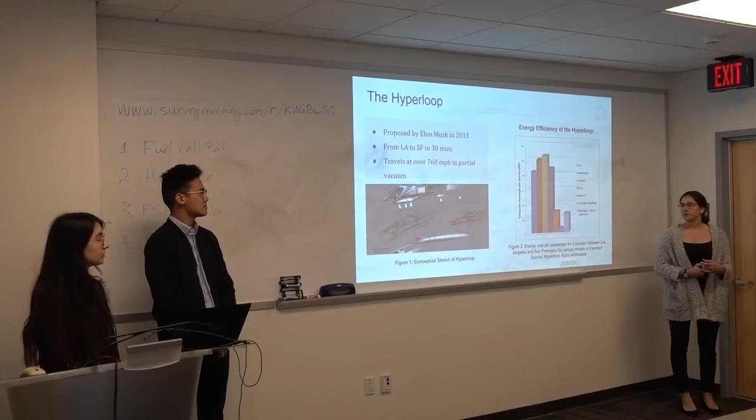So a bit about the Hyperloop concept in general. It was first proposed in 2013 by Elon Musk in the Hyperloop Alpha white paper. It has the potential to take you from LA to San Francisco in under 30 minutes, which means that you could live in LA and work in San Francisco, which is pretty amazing. It would be a lot more efficient and sustainable than our current modes of transportation. And it has the potential to be the fifth mode of transportation that we have.

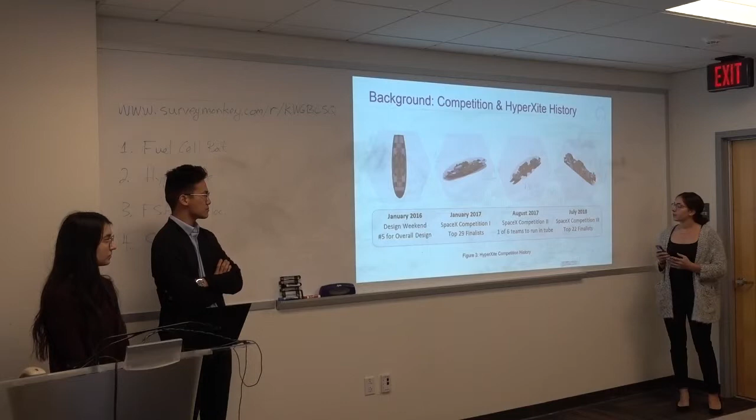A bit about HyperXite as a team. We were first formed in 2015 and attended design weekend in 2016, and we placed fifth for our overall pod design worldwide. The following year we attended the first SpaceX competition where we were one of the top 29 finalists, and later that year we were one of 6 to run in the open air Hyperloop vacuum tube. And this past July we were one of the top 22 finalists to attend the third SpaceX competition.

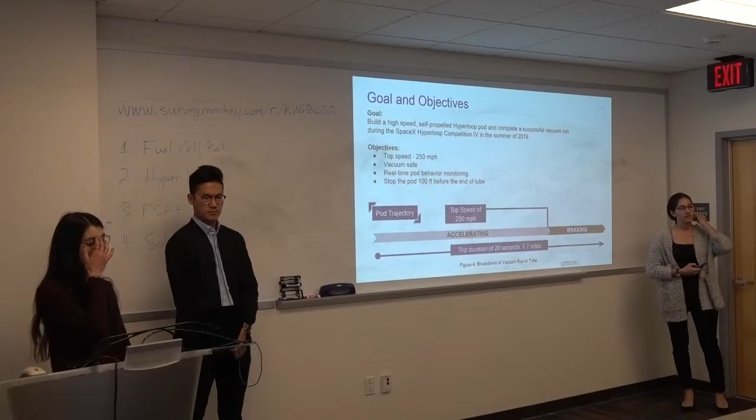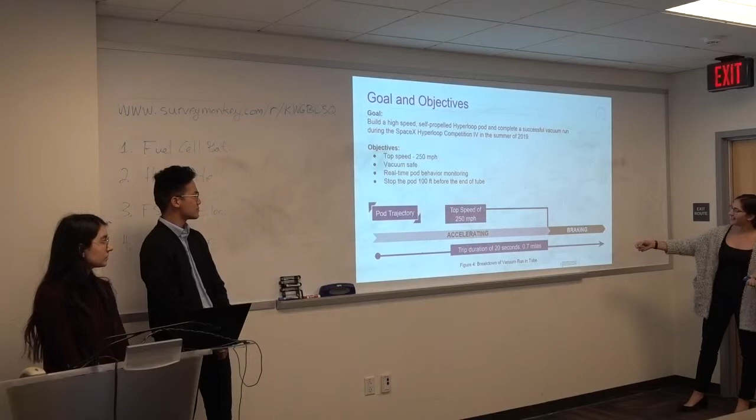So about our goals and objectives for this year, our goal is to build a high-speed self-propelled pod and complete a safe, successful vacuum run at the fourth SpaceX competition, which is going to take place next summer. And our objectives are to reach a top speed of 250 miles per hour, be vacuum safe, have real-time pod monitoring behavior, and stop safely 100 feet before the end of the tube. And here's a schematic of our pod trajectory. As you can see, we spend most of the time accelerating and then a bit of the time braking.

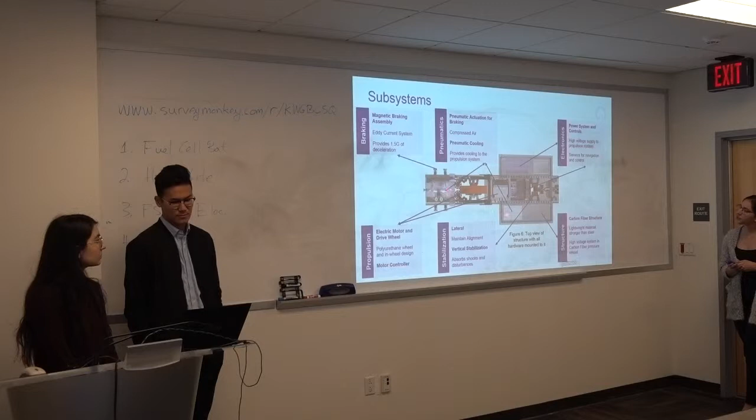We're going to go into more details about each of the different subsystems, but just to give you an idea of how everything fits together, that's the front of our pod, and our braking system is attached to the front. Our propulsion system is right here. We'll go more into detail about that too. Our pneumatics, they actuate our brakes, and here's our coolant. Electronics are placed, batteries are placed in a pressure vessel over here, and then we have our control system. And then our structure is the whole thing, and our stabilization, we have both lateral and vertical stabilization to stabilize our pod.

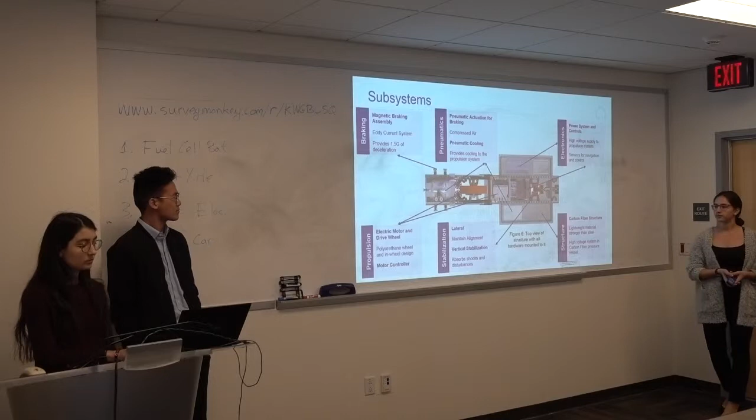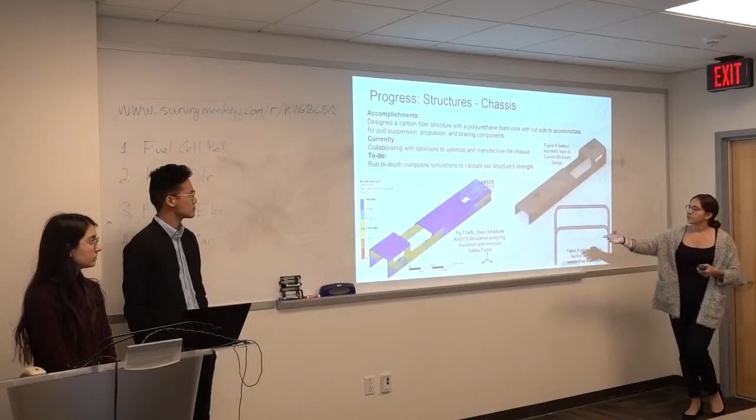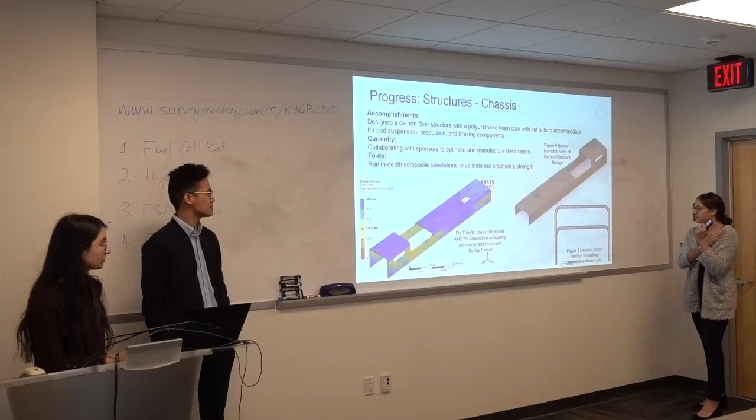So the progress of our structure, where we're at right now is we have designed a carbon fiber structure with a polyurethane foam core with cutouts to accommodate for mounting different components onto the pod. Right now we're optimizing our design and contacting companies to see if they have any feedback for us and how they can help. And the next step would be to run in-depth simulations to make sure that our design will work. This is a static structural simulation of our design, and this is a render. So as you can see, it looks like we're on the right track. And here's a cross-section of how the carbon fiber would have a foam core.

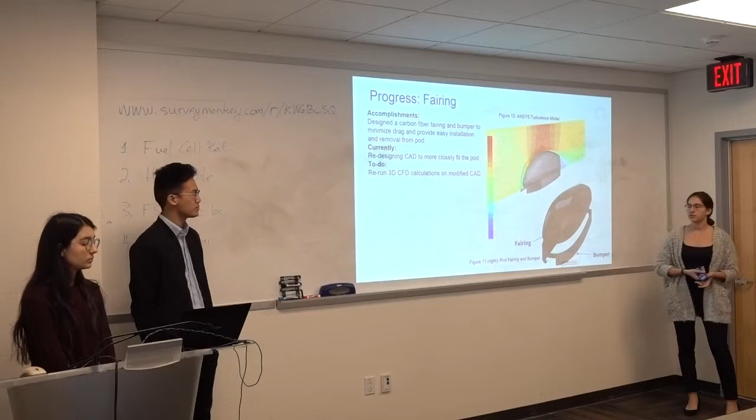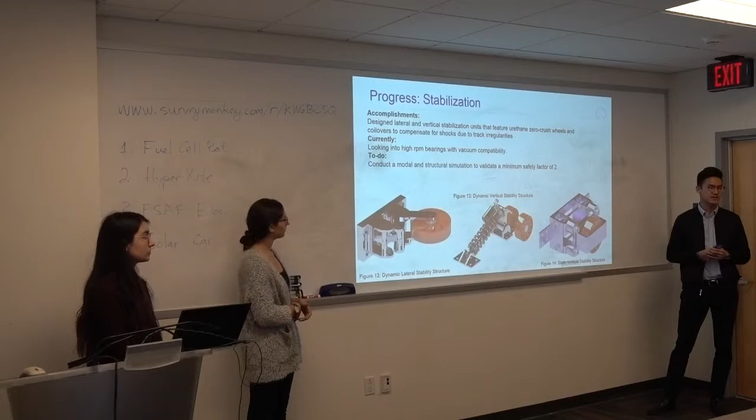Right now we're looking into high RPM bearings to work for 250 miles per hour with a 3.5 inch diameter wheel, and that is also vacuum safe. Later on, we're going to also need to do some vibrational analysis as well as some structural simulations for all of these components. Right now, we're doing some preliminary simulations as well.

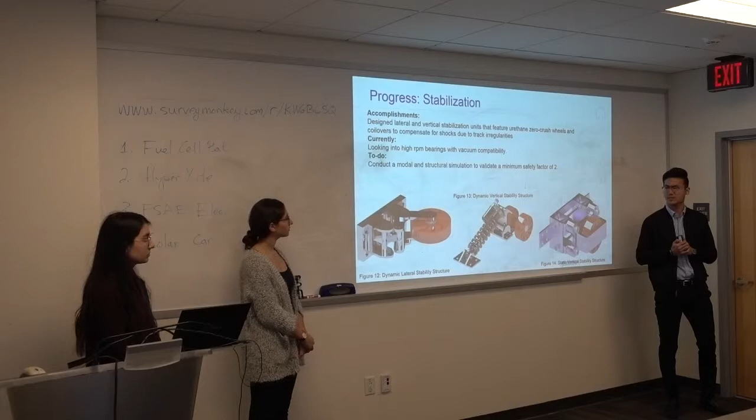So for our power systems, we're going to be using the same high voltage system as last year, which consists of 10 LiPo batteries, each with 44.4 volts, each in series. It's going to provide around 450 volts and a max operating current of 480 amps to our Emrax 228 motor, which is going to be our only source of propulsion.

And these batteries are not vacuum safe, so we do need a pressure vessel to contain them. Right now, we're actually looking into getting rid of a pressure vessel and replacing that with clamping these batteries to simulate the atmospheric pressure. That would save a lot of weight and also reduce the size of our pod as well. That is going to be managed using the Orion battery management system.

And later down the line, once we have our system completely set, we'll be doing more rigorous testing of our high voltage system just to prove to SpaceX that we can effectively use these batteries to propel us and also do it safely, which is always a main concern for SpaceX.

For controls, we've been able to develop the state machine, which is essentially the top level functionality of our pod and how it's being controlled. We've narrowed down our microcontrollers to the BeagleBone Black and the Hercules Launchpad. Right now, we're setting up a plan to conduct vacuum testing on these components, since the documentation for these microcontrollers didn't include vacuum safety. So we'll be conducting those tests within the next couple of weeks.

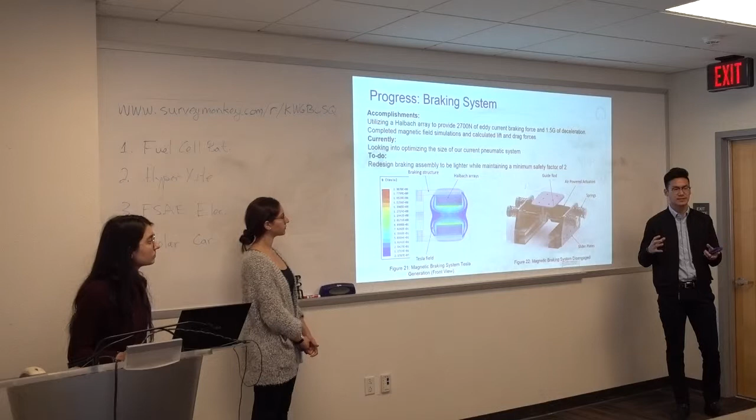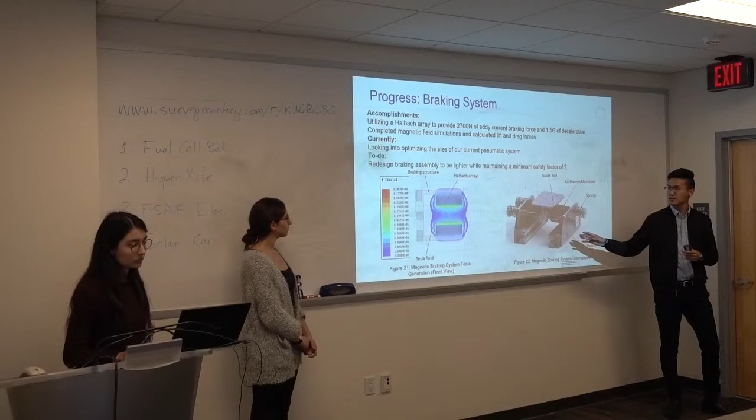And we're currently looking into optimizing and reducing the size of our pneumatic system on this braking assembly, just to reduce weight, of course. And we're also going to be optimizing the structure as well, just to make it lighter. Right now it's around 63 kilos. We're going to try and knock that down to around 45 kilos, and also maintain the same minimum factor of safety of 2 that SpaceX requires.

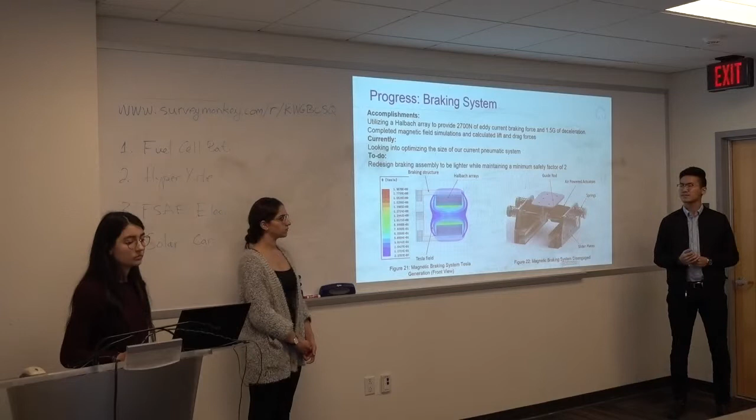So moving on to propulsion, we're going to be using the same Emrax 228 motor and in-wheel design that we have been using at the last competition. The only major change is that we're going to be using a new motor mount. This motor mount is still going to be able to provide around 5,000 newtons of downforce on the drive wheel, but this time around we're going to be using coilovers to allow for some shock absorption and dampening for our pod moving at 250 miles per hour.

Currently, we're trying to redesign this mount just to optimize it, as well as the suspension mount that interfaces with the coilover, and trying to figure out the exact dimensions that we need to get that 5,000 newtons of downforce for the drive wheel. And later on, we're going to need to do more thorough testing of our Emrax motor, under load as well as without load. Once we have our test track built, we'll be able to do more thorough testing on that.

Our cooling system will be used to cool our motor and our motor controller, and we decided to use deionized water as our coolant, which will be stored in a 0.85 gallon reservoir. And currently we're determining the required cooling rate to prevent our motor and motor controller from reaching 60 degrees Celsius, which is its maximum operating temperature.

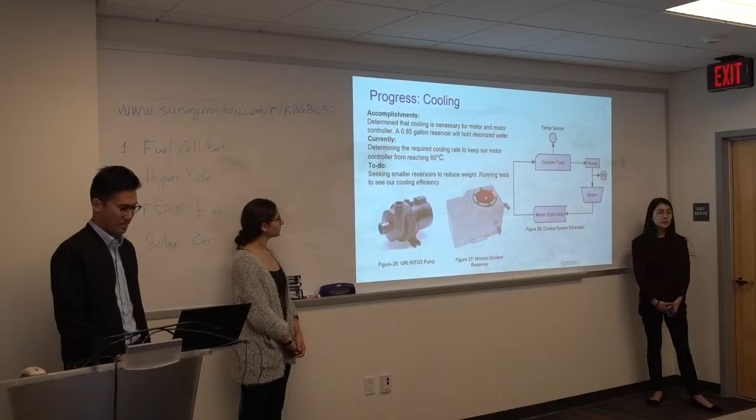In the future, we'll be optimizing our design and speccing out smaller size reservoirs to reduce the overall weight, in addition to running tests to determine our cooling efficiency. And right here you see an image of a pump and our coolant reservoir, and then this is our cooling system schematic as well.

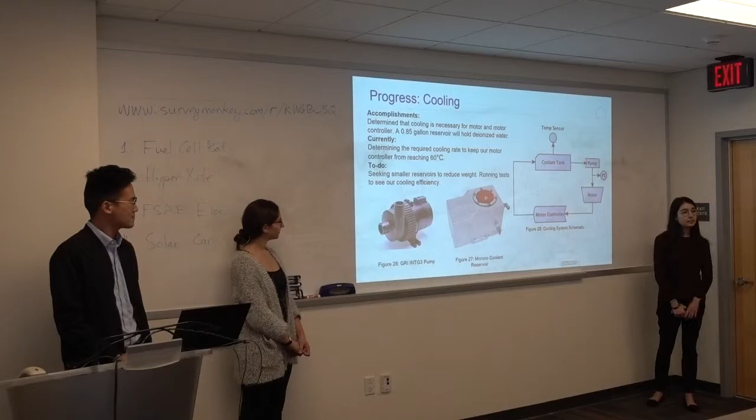For pneumatics, we decided to use a Luxfer M060 air tank, and it has a maximum operating test pressure of 5,000 psi. We will be running at around 3,000 psi. And our pneumatic system design includes several safety features to safely and properly actuate our braking system.

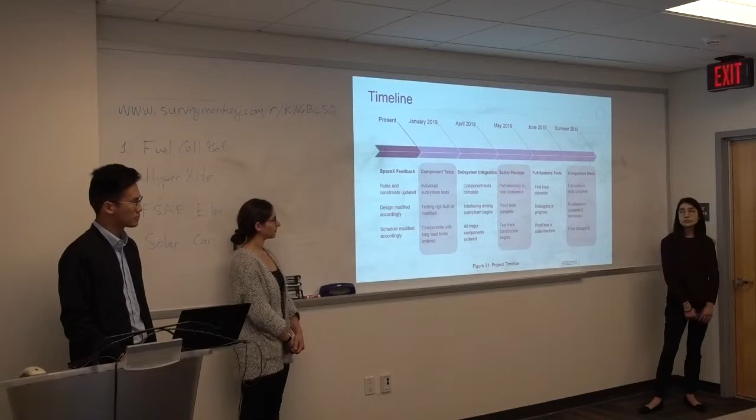Any questions? All right, so I really love the graph.